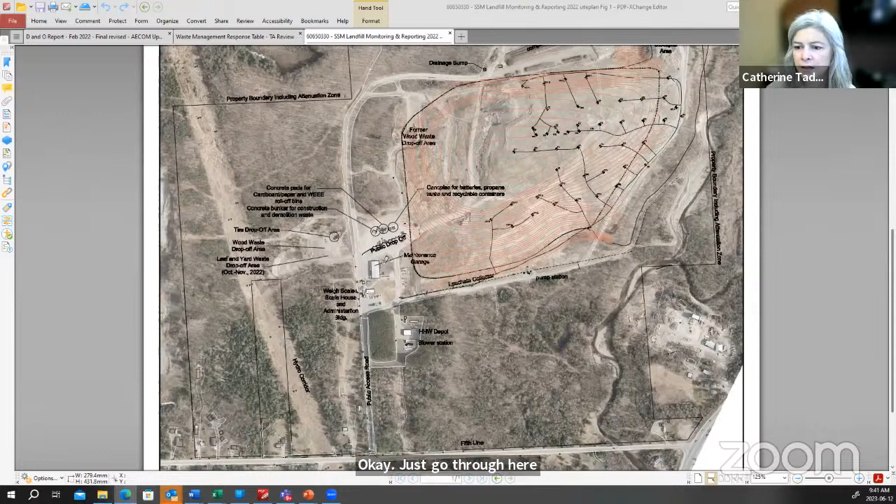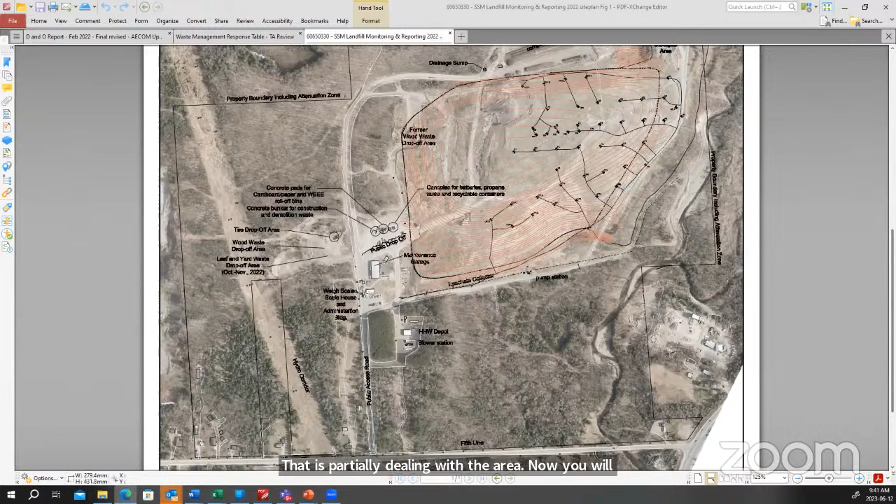Okay, just go through here. We have Jace Dominy from the Ministry of the Environment. Jace, did you want to introduce yourself? Good morning everyone, I'm Jace Dominy. I'm the environmental officer partially dealing with the area now. You will see Sarah Louchis on here as well, and she's the new environmental officer dealing with Sault Ste. Marie, and she can introduce herself as well. Okay, great.

Hi, Sarah. Hi there, can you hear me? Yeah, hi, I'm Sarah Lauschus. I work with Jace Dominy in the Sault Ste. Marie office, and like he said, I'm a new environmental officer who will probably eventually be taking over this area. Okay, great to have you.

So I think that's everyone. We'll let Rick introduce Rob, we can put him on the agenda here. I've now got a view where I can see everybody on the screen. Oh, great. So I'm Rick Talvitie, everyone. I work with AECOM, a local engineering firm. We've been intimately involved with the landfill site for over 20 years now in terms of planning and operational issues. And we work with our subconsultant Dillon to produce the annual reports.

And I'll let Rob Kell introduce himself. I'm Rob Kell, I work for Dillon. I've been working at the Sault Ste. Marie landfill for about 30 years, and for the last 20 of them working alongside AECOM.

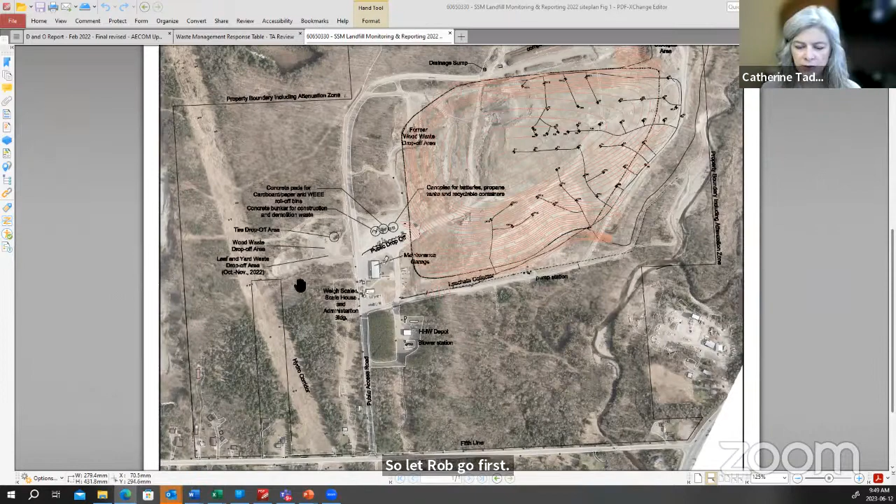So again, Rick Talvitie with AECOM. Before I get into the reports, and given we do have some new members, I thought it would be worthwhile to put up an aerial image of the landfill site itself, just to give the lay of the land as we talk through some of the content of the presentation.

So what I have up on the screen is an aerial image of the landfill. Down at the bottom of my screen here is Fifth Line, and this here is the access road into the landfill site. We have our household hazardous waste depot here, together with our blower station, which is used to draw landfill gas from the landfill mass. So this is our landfill mass itself up here. This is where we're disposing of waste within the landfill footprint. You'll see these lines with these little dots on them.

This is the landfill gas collection system. So the little dots are landfill vertical wells within the landfill mass. And then there's a series of underground pipes, which are these black lines. Those pipes will all come down to the blower station. So basically there's a large fan at the blower station, which puts a vacuum within the landfill mass where these pipes are, and draws landfill gas out of our landfill mass. And down at the blower station, there's a flare where we burn that landfill gas.

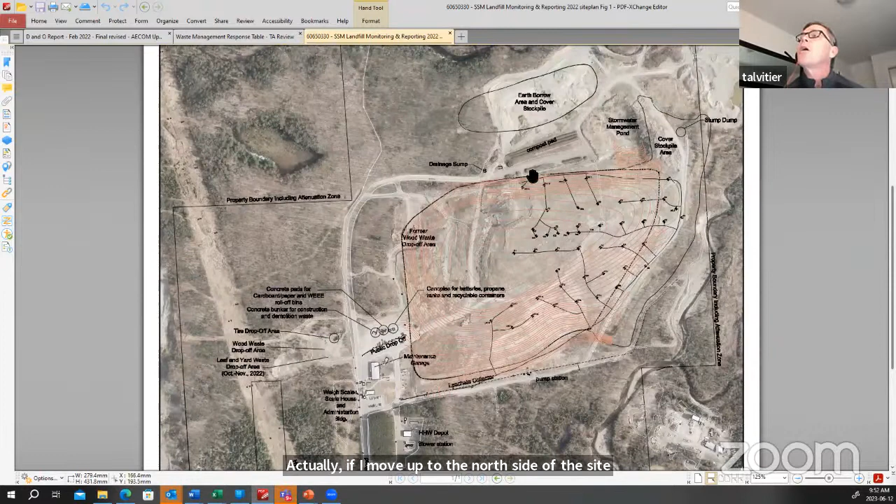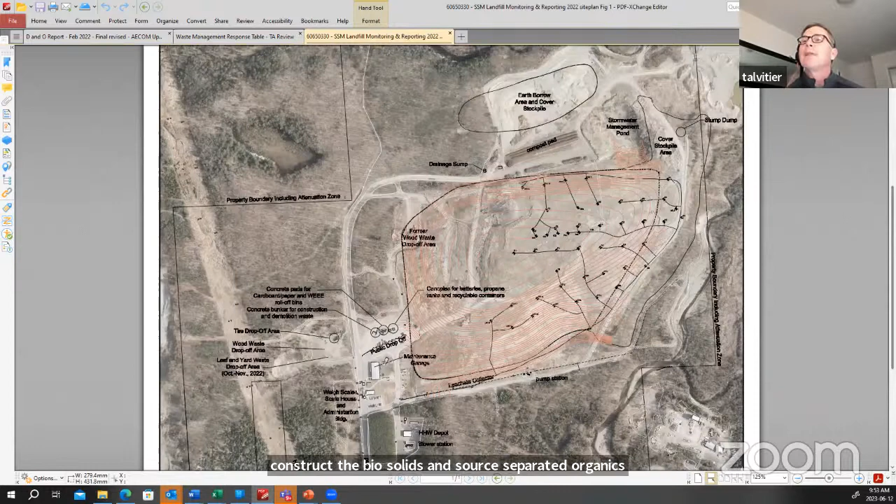So that just gives you a little bit of the lay of the land. Actually, if I move up to the north side of the site before I move on, there is our composting pad up here where we do compost leaf and yard waste. And we've been actively excavating earthen materials from the north portion of the site to use for landfill cover. And this is the area here where we are proposing to construct the biosolids and source separated organics processing facility. So that gives you a little bit of the lay of the land, and then we can lead right into the presentation.

So what we want to do today is present to you the two reports that we prepare on an annual basis for the landfill site. There's two separate reports, one prepared by AECOM, called the Site Development and Operations Report, which you see in the background here. That report provides information on site operations over the course of the 2022 operating year. The other report is prepared by our subconsultant Dillon, called the Monitoring Report, and it addresses groundwater and surface water quality within and around the landfill site, and also talks about landfill gas. So I'm going to lead right into the Site Development and Operations Report.

The first thing we want to highlight is that site operations and reporting requirements are dictated by what Peter referred to earlier, the site certificate of approval. It's basically the license issued by the Ministry of Environment, Conservation and Parks in terms of how the site is to be operated and reported on each year. Our site accepts domestic, commercial, and non-hazardous solid industrial waste and processed organic waste. When we talk about processed organic waste, we're really talking about sewage sludge generated at our two sewage treatment plants. We currently have a tipping fee of $77 per ton and a gate fee of $11 per visit for anything up to 300 kilograms. So when a residential customer visits the site, they pay $11 at the gate, as long as they're not bringing in more than 300 kilograms. If they bring in more than 300, then the tipping fee, the $77 per ton, would kick in. And as I noted, the reporting period is the calendar year.

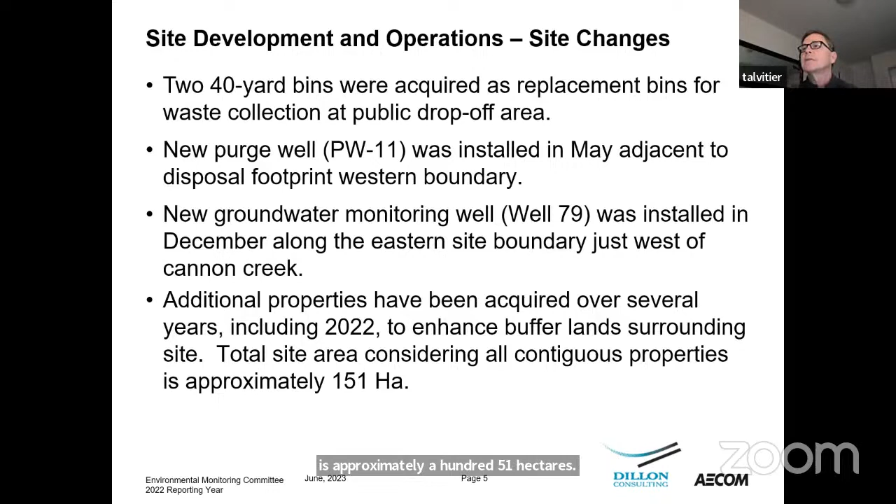There are a number of diversion activities that occur at the landfill site. In the bottom right-hand corner, you can see a photo of the household hazardous waste depot. We also have a couple of other photos at the public waste drop-off where we have an electronics bin, and normal collection of the typical blue box and yellow box materials in terms of containers and fibers.

As we mentioned, there's a leaf and yard waste drop-off area at the public drop-off, a small concrete compound where people can deposit their leaf and yard waste. That has now been established at the public drop-off. We had an interim area to the west of the public drop-off, and now there's an area right at the public drop-off for depositing leaf and yard waste.

There are also areas for tires, batteries, propane tanks, metals and appliances. Wood waste is immediately to the west of the public drop-off area. As I mentioned, normal recyclables, fibers, and containers, and then we have waste electrical and electronic equipment at our household hazardous waste depot.

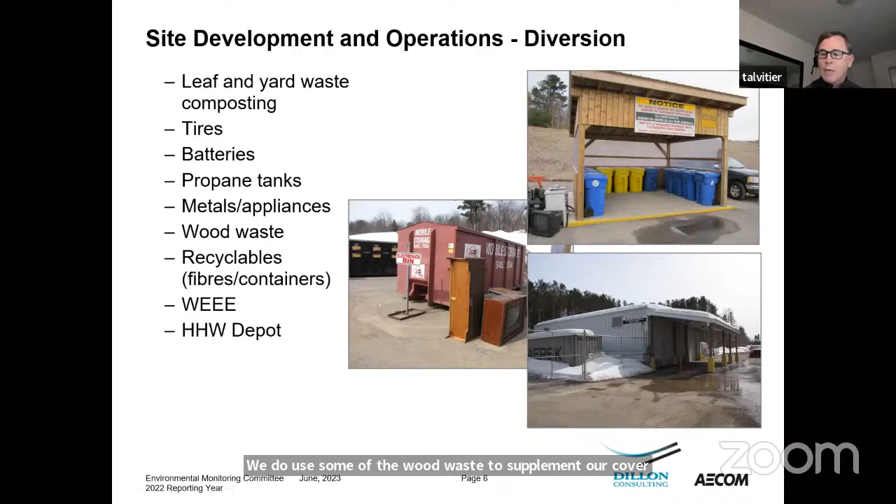Those are all materials that are diverted from the landfill. They don't end up in our landfill as waste. We do use some of the wood waste to supplement our cover materials in some cases, but in general it's not considered waste—it's used for a beneficial purpose to supplement our cover.

When we talk about nuisance management, the two key items are litter control and odors. For litter control, we are actively compacting the waste on a daily basis with the waste compactor, which binds the waste together to try and prevent windblown litter. The waste is also covered on a regular basis to prevent windblown litter.

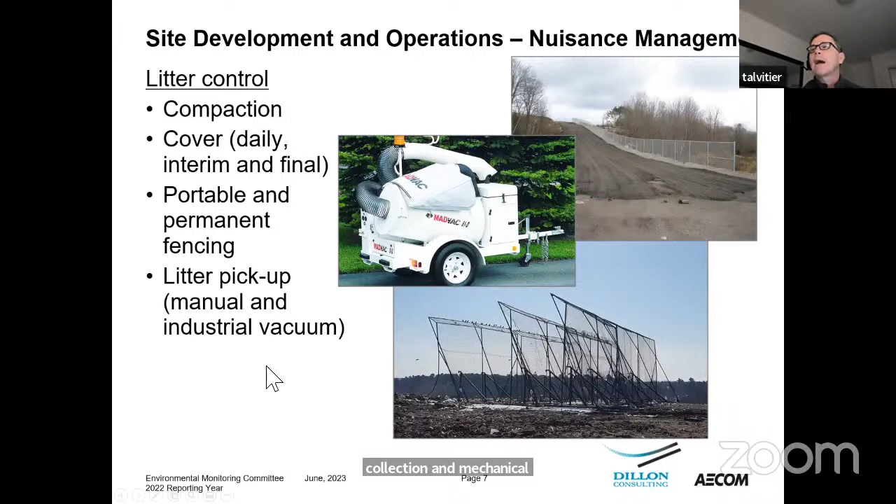On the odor control side, one of the principal items we have is the active landfill gas collection system—that series of pipes I highlighted at the beginning of the presentation. Here in the top right corner is a picture of the flare where we burn that landfill gas, and we have our blower station, which creates a vacuum within the landfill mass, drawing the foul air out and burning it at the flare.

The other major item that produces odor is the sewage sludge that comes from the treatment plants. Before that sewage sludge leaves the treatment plants, an odor neutralizer is applied to the trailers that contain the sludge before it leaves the two sewage treatment plants and comes to the landfill.

Once the sewage sludge is emptied at the landfill, they reapply the odor neutralizer before those empty trailers are hauled back to the two sewage treatment plants. When they're in transit with the sewage sludge, impermeable tarps are applied to the trailers to try and contain those odors, and we do regular wash downs of those trailers.

36 of those washes were completed in 2022, intended to remove residual sewage sludge on the trailers that may create odors. At the landfill site itself, we have a portable odor neutralizing mist sprayer, shown in this photo in the lower right-hand corner, which is used when we are tipping the biosolids at the working face.

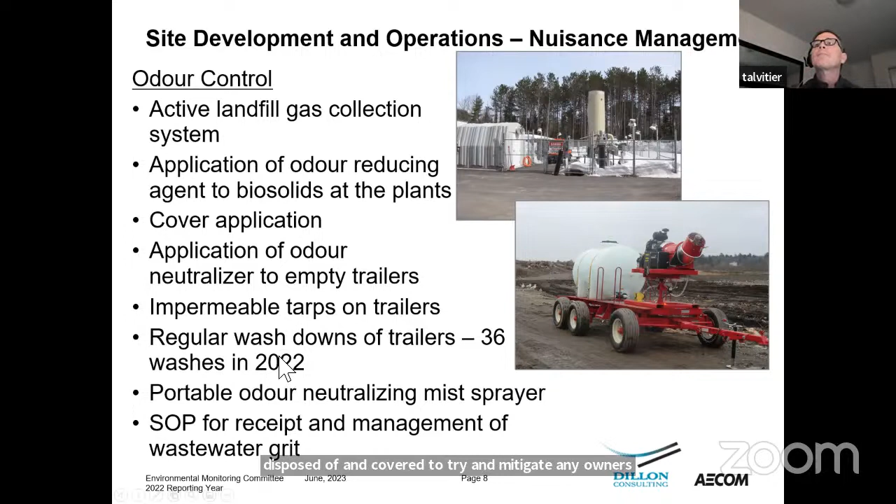This graphic shows where we've been active with waste disposal in 2022 and where we plan to be active in 2023. Our active waste disposal area has been in the northwest corner of the landfill footprint, and that will continue in 2023. There may be an area in the central portion of the site that we move to in 2023 as well. We're currently discussing that with landfill operations staff.

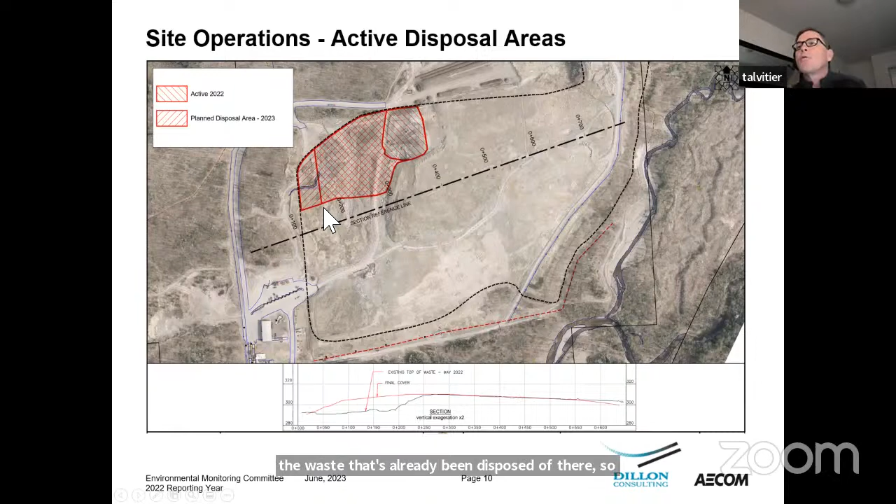With the landfill expansion, we've identified an area in the southwest portion of the site where we will be mining the existing waste out — excavating waste already disposed of there so we can install a leachate collection system underneath. So we want to try to stay out of the southwest quadrant as much as we can, to minimize the amount of waste we'll have to excavate there in the future.

This graphic shows where our residual capacity lies. Where you see yellow, we've reached the final contour or final elevation of the waste mound, so a lot of the eastern portion of the site has been filled to capacity. The darker colors, the purples and darker blues, show the areas with the largest available capacity remaining — purple means more than 15 meters of depth remaining, and darker blues are anywhere from 6 to 15 meters. As we get into the lighter blues, there's still some capacity, but it's a little less.

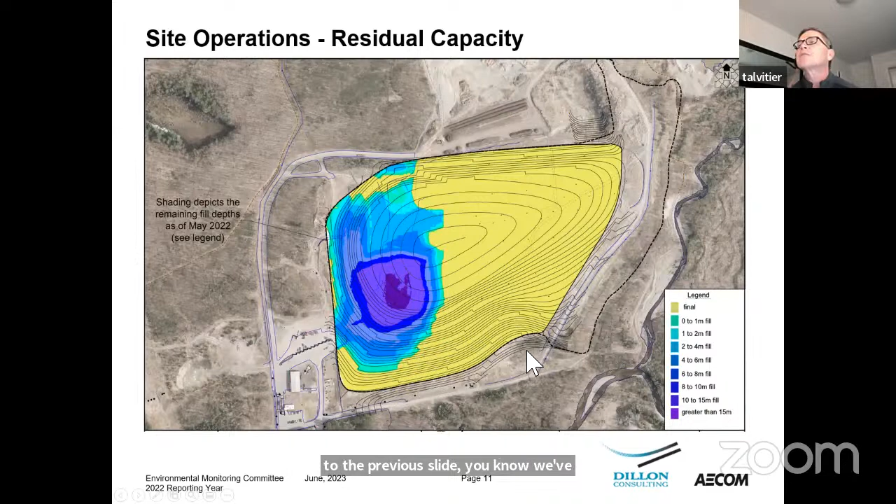Looking at the historical waste diversion rate, there was a significant focus on enhancing diversion activities in the early 2000s. We were engaged by the city to do planning work related to their waste programs, and at that time there was a distinct need to enhance diversion. It paid off as we increased diversion substantially from around 10% up to and above 30%. There was a period where we reported diversion in the mid-30s, but we identified discrepancies where it may have been overstated somewhat — that was corrected. Generally speaking, we've been in the 30% range now for 6 or 7 years, which is probably where it should have been in those earlier years too, closer to 30%.

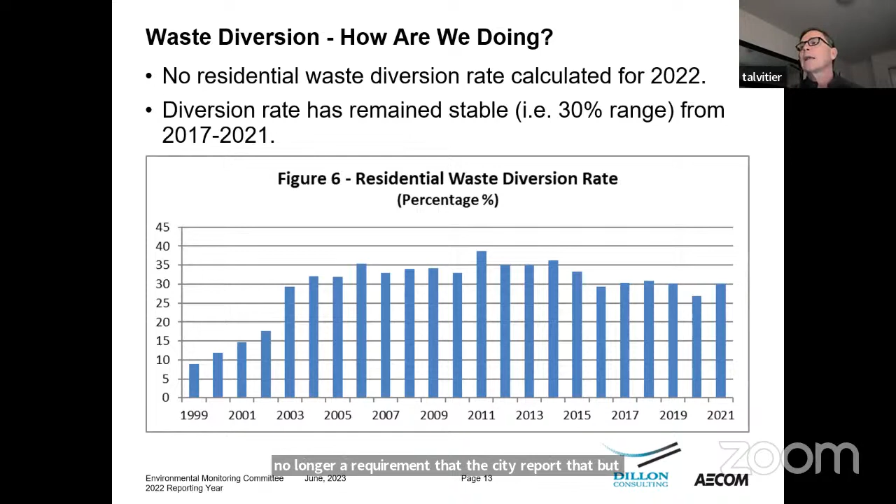We are no longer required to report to Waste Diversion Ontario with our diversion rates, so the last year we've reported is 2021. We don't have a diversion rate for 2022 since it's no longer a requirement, but we expect it continues to be in that 30% range.

When we look at waste disposal quantities, these are the quantities of waste actually disposed of in the landfill mass. There was a time back in the late 90s where we were disposing of in excess of 100,000 tons a year, and as you can see, there's been a steady decline over time. Over the past roughly 5 years, we've generally been around the 40,000 ton per year mark.

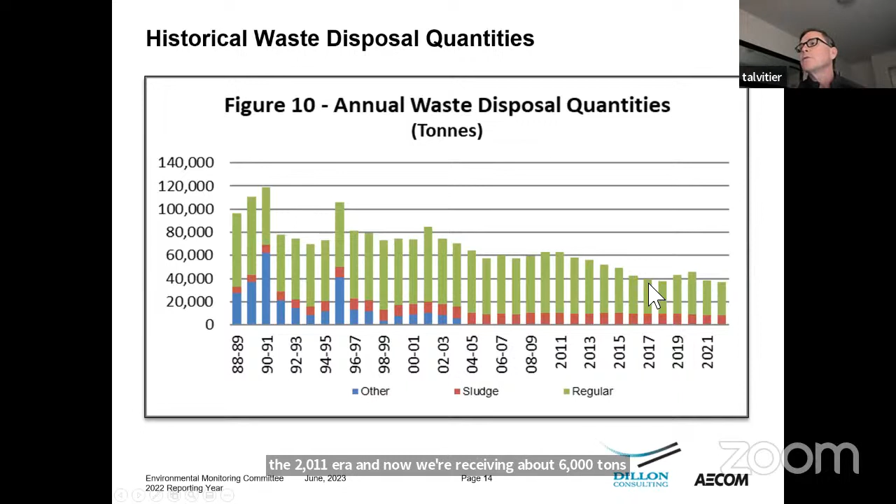In the last 2 years, we've actually been below that, in the 38,000 and 36,000 ton per year range. Part of the decline from 2011 through to 2017 relates to the fact that some of our industrial, commercial, and institutional waste is being exported to a northern Michigan landfill. There was a time we were accepting about 25,000 tons of commercial or business waste at the landfill back in the 2011 era, and now we're receiving about 6,000 tons. So a lot of this decline in waste is related to the ICI waste.

If we look at waste received at the landfill, we've got two pie charts here, one showing 2021 and one showing 2022. Just to contrast, what we received in 2021 was 112,000 tons of waste at the landfill, but what we actually landfilled that year was about 38,000 tons. The reason for such a big disparity between what we received and what we landfilled is because we received a significant amount of surplus construction materials, largely old aggregates and soil materials, and we actually use those materials for cover. So they don't factor into our landfilled waste quantity.

Similarly, in 2022, we received 84,000 tons of waste and ended up landfilling about 36,000 tons. So again we saw a large proportion of surplus materials from construction projects, not quite as high as in 2021, but still a fairly significant amount of waste construction materials being used for cover material.

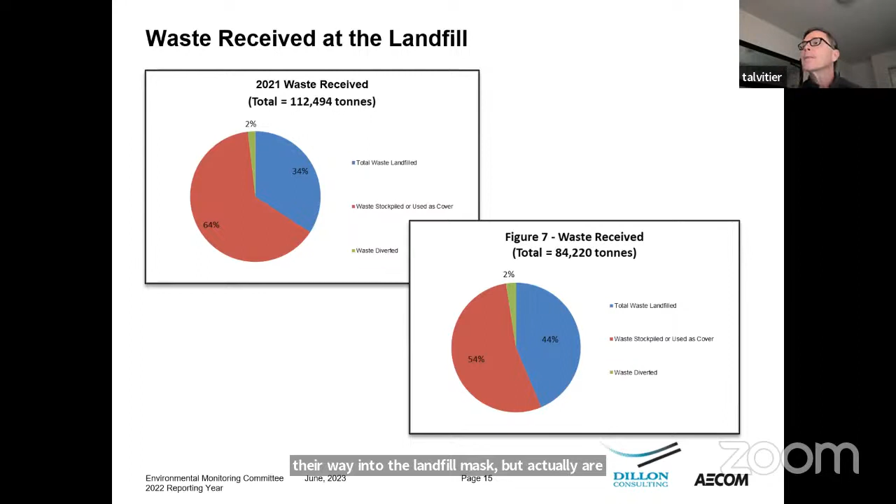You'll see waste diverted, that small piece of the pie is basically those diversion activities we went through earlier that don't find their way into the landfill mass, but actually leave the site and get distributed elsewhere. When we compare that 2% diversion quantity between 2021 and 2022, the numbers are quite similar, just over 2,000 tons in both years.

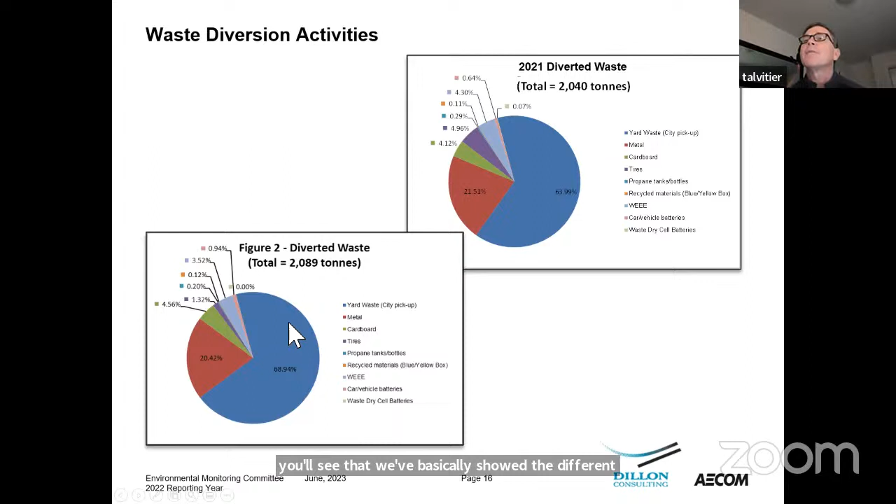We've basically shown the different types of materials being diverted from the landfill, the biggest being yard waste, which makes up almost 70% of the diverted waste. The other big one is metals, making up about 20%, then we have cardboard material, tires, etc. That is the makeup of the diverted waste, and it does seem fairly consistent year over year.

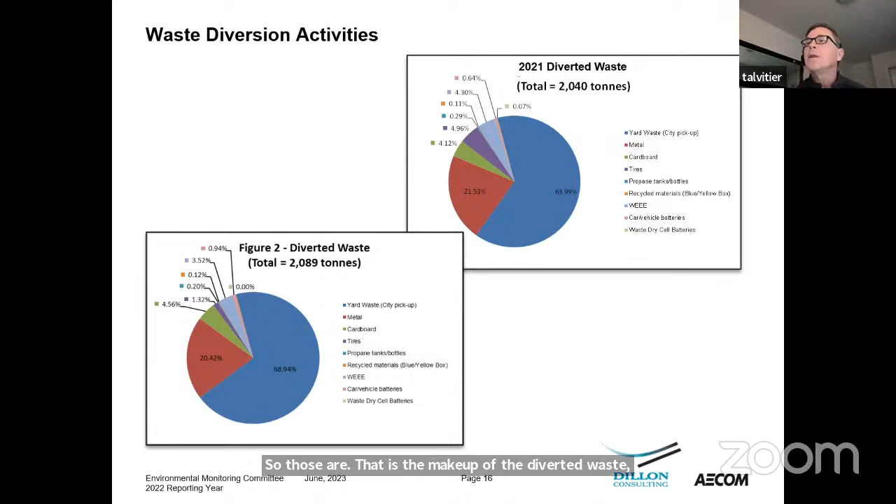Now when we look at the landfilled waste type, this is the waste that actually gets disposed of in our landfill mass. In 2021 we had about 38,000 tons, and in 2022 about 37,000 tons, so fairly similar, with a slight drop in 2022.

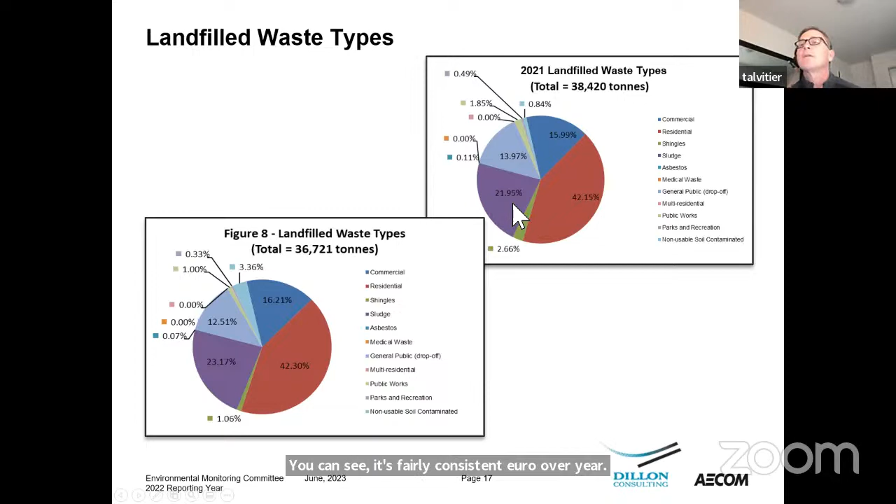If we look at the major components, about 16% is commercial waste. The lion's share is residential waste, primarily coming from our curbside program, as well as residential waste deposited at the public drop-off, making up about 42% of our waste. We also have shingles, and sewage sludge is a major component. The general public drop-off makes up about 13%, and you can see it's fairly consistent year over year. Those are the major components of the waste being deposited in the landfill.

Residual waste disposal capacity is computed and reported annually. It will fluctuate year to year for various reasons. One reason is our landfill mass has up to 30 meters of waste depth in it, so over time underlying waste will settle and degrade, which may actually generate additional disposal capacity as that waste settles.

Capacity also depends on how interim cover and contaminated soils are managed within the disposal footprint, and on waste types and disposal rates. At the end of 2022, as Peter indicated, we have approximately 5 years of residual site life left. Comparing that to the end of 2021, when we reported 5.3 years of residual capacity, despite operating the site for a full year, we only used up 0.3 years of capacity.

The reason for that is we don't complete a full survey of the site every year, so we're using a survey that may be a little dated, adding to it the waste that has come into the site based on quantities crossing the waste scales. In other cases, when we do survey, we may find that areas where we thought we no longer had disposal capacity actually have additional capacity due to settlement. So going from 2021 to 2022, we're reporting that we've used up 0.3 years of capacity.

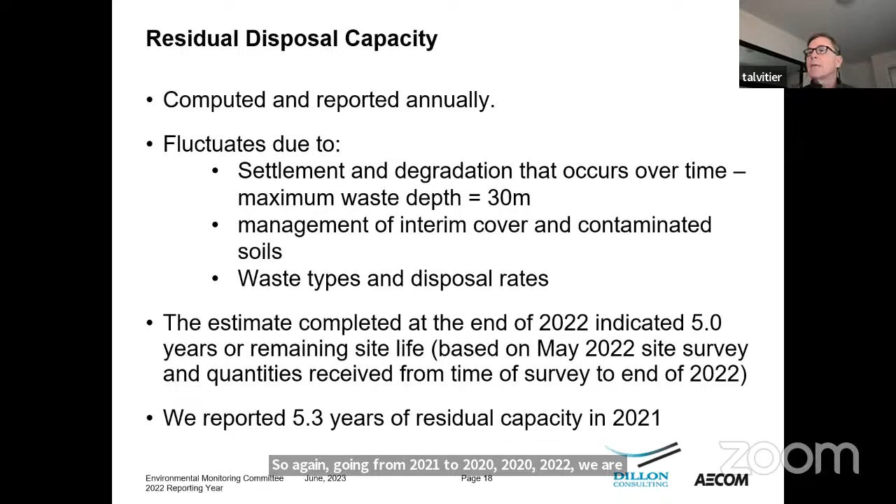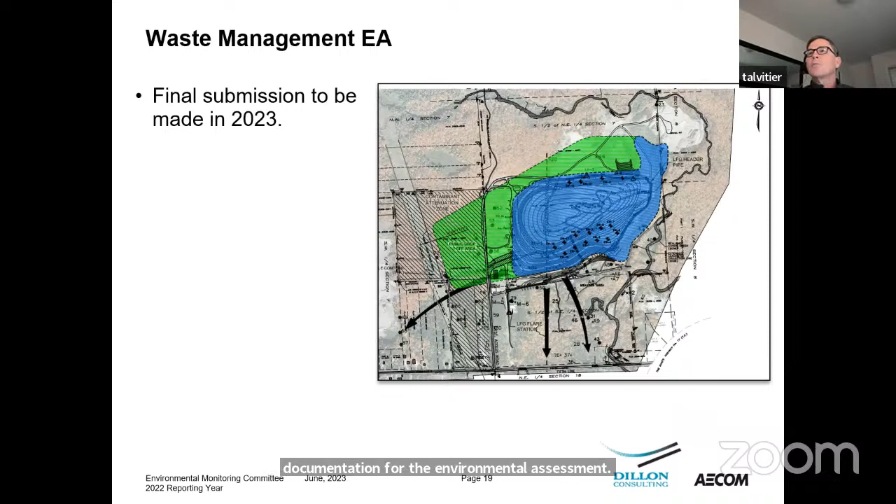For those that are new, on the waste EA map, the blue represents the existing disposal footprint we currently have. The green shows the new disposal area we're looking to get approved through the environmental assessment process, which would give us additional capacity of approximately 20 years. We're currently working on the final touches of the documentation for the environmental assessment, and we'll be submitting that in the near term to the Ministry of the Environment.

Before turning it over to Rob to talk about the monitoring report, I want to re-highlight what we do in terms of managing potentially contaminated groundwater generated from the waste mound. We have a horizontal collector that operates much like a French drain along the south and southeast portion of the site. As groundwater flows towards the south and southeast, it enters this subsurface collector and flows by gravity to our pump station on site.

On the western side of the site, we have a series of 11 purge wells that operate continuously, collecting groundwater and sending it to our pump station. That leachate is then pumped to the West End Sewage Treatment Plant for treatment. In 2022, we averaged 13.9 liters per second over the course of the year continuously, or 439,000 cubic meters of leachate collected and sent to treatment.

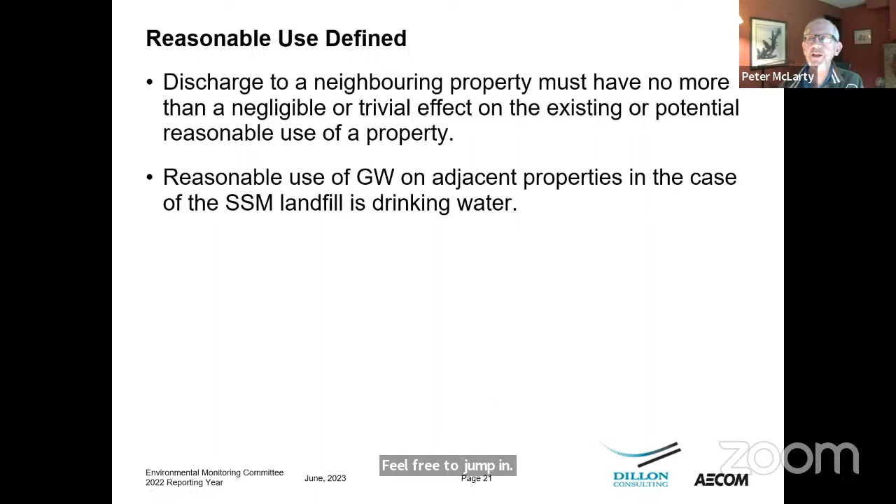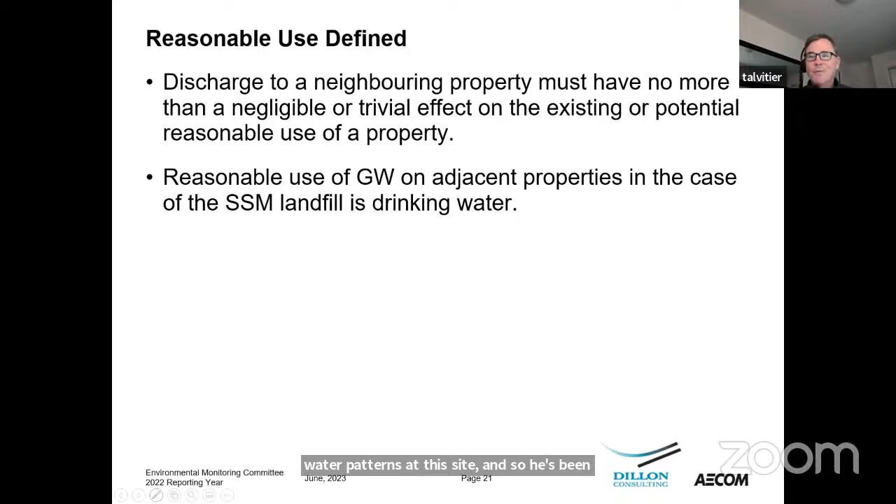Okay, Rick, you want to introduce Rob again? Yep, so Rob Kell, as I mentioned, is with Dillon Consulting. They've been actively involved with site monitoring dating back, actually they were involved when the city initially took over this landfill site from Cherokee Disposals back in the late 80s. Rob has a long operating history and very extensive knowledge of the groundwater and surface water patterns at this site, and he's been reporting on it for over 30 years. So Rob, over to you. Okay, so thank you.

Our first few slides are going to be talking about how we assess our water quality. So there are repeats from before, but with the number of new members, it's important for us just to get a little bit of a basis on how we assess our groundwater quality.

Our first definition would be called reasonable use, and that is developed by the Ministry of the Environment. It's a measure of how you can discharge to a neighbor property, but it has to be no more than a negligible or trivial effect. For the case of the Sault Ste. Marie landfill, our reasonable use of water is drinking water.

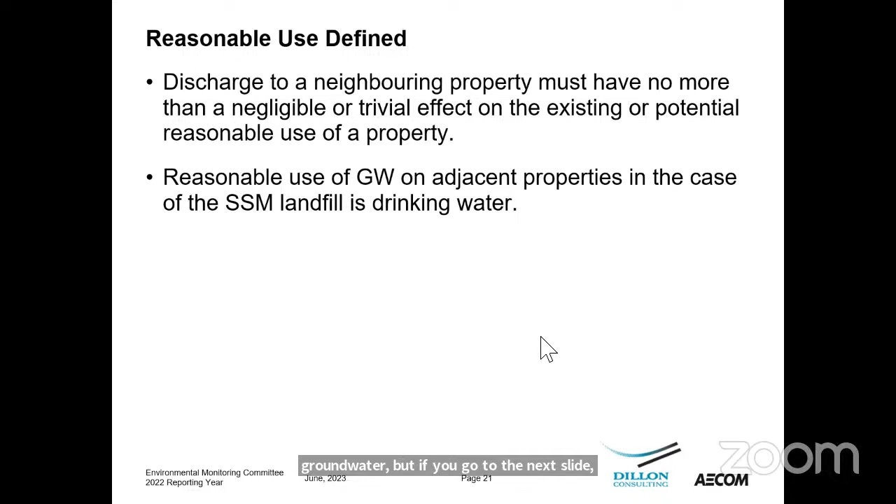But if you go to the next slide, please, Rick, or whoever's running the show. This is kind of a graphic.

So there are drinking water standards, but to establish a trivial effect, what's been established is that we cannot degrade water quality more than 25% of the difference between our background and the drinking water standard for health-related parameters. For aesthetic parameters such as chloride, you're allowed 50%. So it's not that we can degrade water quality up to the standards, we're only allowed a proportion of that. There's a graphic there that assesses it.

So we have a background water quality. For health-related parameters, it's only 25% of an increase, and for the aesthetic, it's 50%. So when I refer to the reasonable use and the standards developed from that, it's only a percentage of the drinking water standard. Next slide.

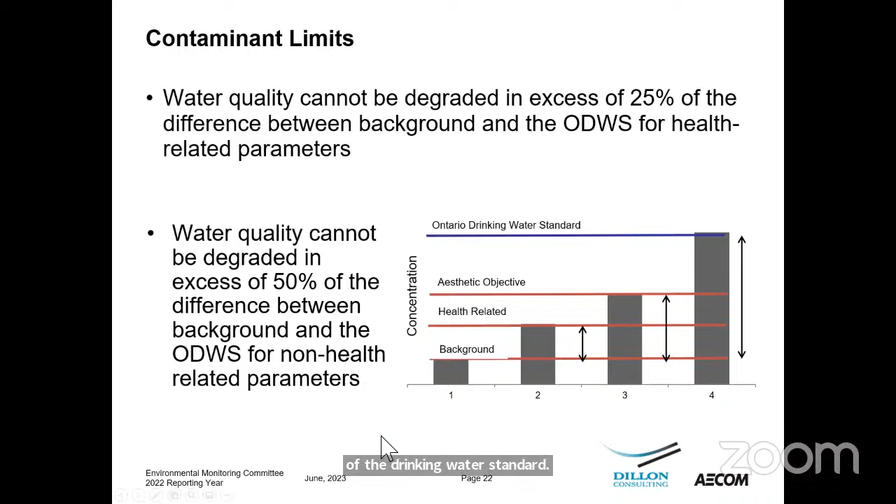Over the years, the first monitoring wells were installed at this site in the early 80s, back when it was Cherokee, but there's been what we call monitors or monitoring wells - I'll use the terms interchangeably. Over the years, there's been over 200. About 98 of them are still in good condition, and we record water levels in them.

Our program requires us to take samples from 40 of the monitoring wells. These monitoring wells are included to be sampled because of their location, and some wells are nearby each other, so we only sample the one well. So there's 40 active monitoring wells where we take samples from.

And then we also take a sample of the leachate or leachate-contaminated groundwater that we collect. In terms of our monitoring wells, we try to establish background wells, or wells that are located what we call up gradient, or away from landfill effects. We have monitoring wells near the landfill mass itself, and we call them source wells. And then our monitoring wells themselves are located along the groundwater flow pathways away from the fill area.

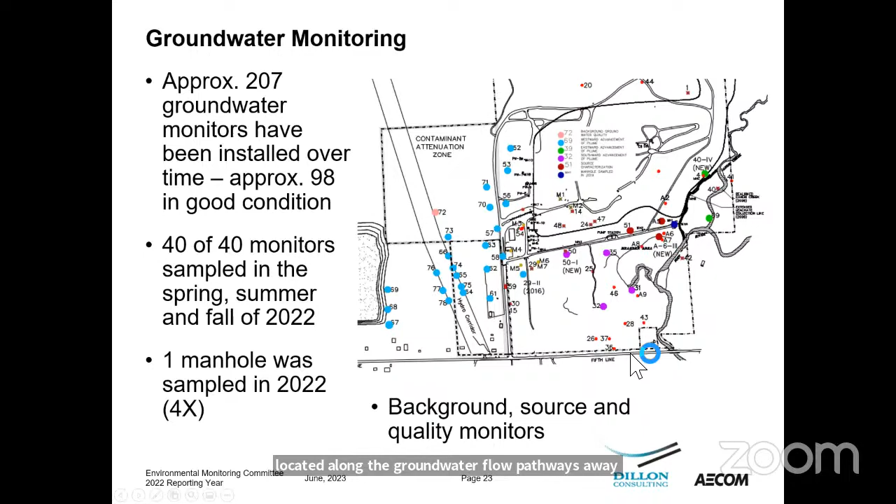Next slide. So what do we monitor and how often? I mentioned this previously, but we take water levels from all existing accessible wells. Water levels allow us to track how groundwater moves on the site.

Similarly to how topography and surface water goes downhill, our water levels in our wells are used to assess where groundwater is moving - it basically moves from areas of high groundwater to areas of low groundwater. I have some graphics later on that show the movement.

For quality, city staff take water samples from the wells. They get sent off to a laboratory. We get our results back and compare them to the reasonable use criteria. The target parameter list we do is general chemistry, and major and minor ions are used more or less to assess groundwater quality trends and impacts. But we also look for trace metals and volatile organics in the groundwater samples.

We also do surface water samples, by the way, but that's coming up. In terms of how we assess if the water quality is being significantly impacted with leachate, what we key on are chloride and alkalinity, electrical conductivity, and total organic carbon.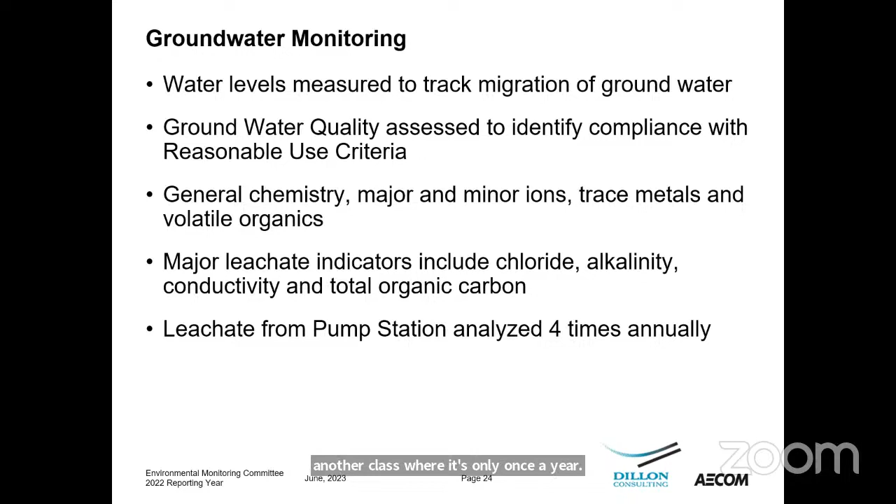So here's a graphic of the site, and I'll spend a little bit of a moment on how groundwater flows and how we collect leachate at the site to prevent off-site migration. First of all, I talked a little bit about the term leachate, and I just used the term leachate impacted groundwater. All the fill on this site lies above the water table.

Rainwater that gets through the final cover, or in our active areas, percolates down through the waste and into natural soil underneath the landfill, and it mixes with the groundwater there. So what we collect on this site is actually groundwater that's been impacted with leachate, and therefore that's why we have a permit to take water, limiting how we do these things. There are two components of groundwater flow at this site, and it all has to do with topography and the effects of the Root River, and the non-effect as you move further away to the west.

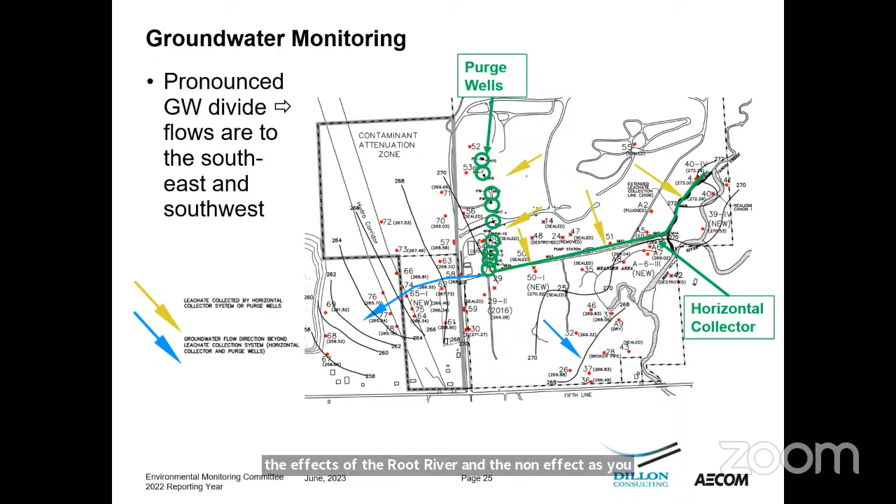So as Rick mentioned, on the south and east side, we have the Root River and Canon Creek. Canon Creek is on the north, and it curls around and comes down the east side. And of course, the Root River is a bit further to the east.

In that area, we established this horizontal collector system. We have topography working for us. The water table is fairly shallow in that area, and so it allowed us to put in a horizontal collector system. The southern leg of that was installed in the early 90s, and then it was extended up along the alignment of the former Canon Creek.

To collect leachate and protect Canon Creek there. South of that collector, if you're familiar with the area, is what we call the meander area. It's a bit more low-lying, and that's the area that back in the 80s was impacted the most at this landfill site. We also have to remember that the landfill was filled east to west, so we really didn't have waste soils on the west side of the site at all. So back in the 80s, all of the impacts were occurring in the meander area beside the Root River.

Our collector system that was installed back in the 90s and extended in the 2000s has really protected that area. As we move off to the west, we have a component of groundwater flow that's not influenced by the Root River and surface water, and it flows kind of in a south and west direction. The topography is such there that the water table is quite deep. So the way we collect impacted groundwater there is with a series of these purge wells.

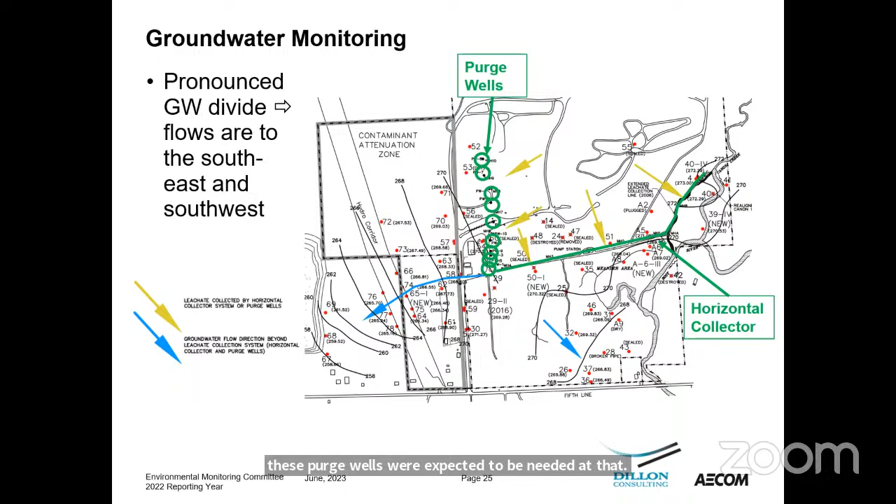We knew that even if you go back to the reports in the early 80s, that once the landfill expanded to the west, we were going to have a westerly component of flow. So the impacts flowing to the west were expected to occur, and these purge wells were expected to be needed at that time. And so they intercept the leachate impacted groundwater as it moves towards the south and west. Maybe next slide.

So the next few slides have a lot of words. They're from the monitoring report, but it's just what we have done in terms of discussion on our monitoring results. We've kind of divided it into those two different zones.

As I said, on the east and southerly boundary, we have good control of leachate impacts, certainly after the extension of the leachate collection system to protect Canon Creek in, I think it was 2006, if I can remember. So it's been in place for a while. We've seen really good improvement in terms of surface water quality, which I will get to, but as well as groundwater quality.

We did install a new well, basically right in the corner of where Canon Creek enters the Root River, just upstream of that point. We had issues with a previous well there that was installed on the landfill side of the collector, and it was, of course, having some impacts. But we found a location where we could install a well that's in between Canon Creek and our collector system, and it will be very valuable in terms of providing some really current data on anything that could be getting beyond our collector, but before it enters Canon Creek.

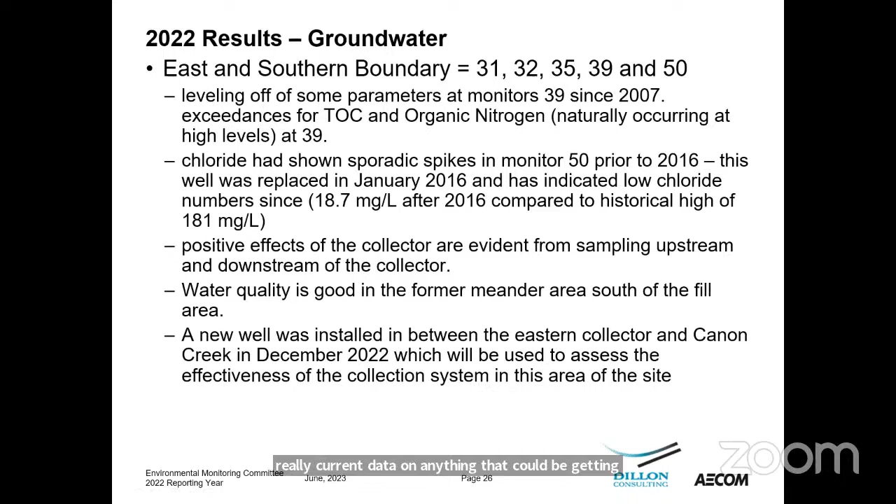I think I'll move on. And so on the western side, we have a number of active wells there. In the northern part, I talk about monitoring wells 71 and 73. They're to the north and they reflect background quality.

We have impacts in this area as groundwater flows beyond our purge well system, and these impacts have resulted in a very narrow plume. I have a graphic in the next slide that shows it, but there's a very narrow groundwater plume that's been in existence now for going on 20 years. The impacts there fluctuate in terms of the amount of, in particular, chloride, which is a nice tracer for this site.

When you take away, when you have the benefit of hindsight and look at the 20 years of data in totality, there hasn't been any kind of worsening of conditions on this site. But we still have this narrow plume that somewhat terminates around the hydro corridor.

Maybe the next slide would be a good one to show. So these are those dark lines. They're what we call isoconcentration lines, or lines of equal concentrations. And you can see that we have this narrow plume that's centered on monitoring well 65 in this case.

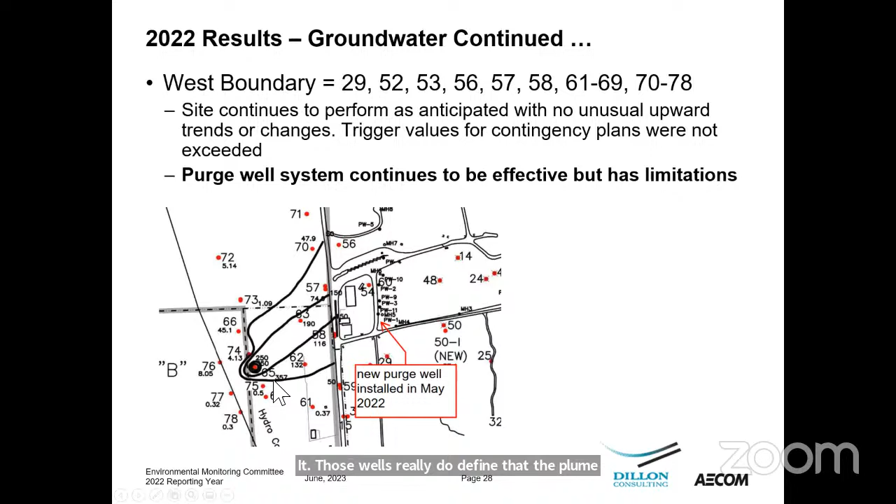Okay, so that's a concentration of chloride. You're looking at 8 milligrams per liter, 0.3 milligrams per liter, and 0.3 milligrams per liter. But if you move closer in that area, you'll see things like 250, 350. So you can see there's a much higher concentration at the hydro corridor. We have some wells installed west of that property boundary there, and it really is an effective boundary. Those wells really do define that the plume is not getting any worse in that southwesterly direction.

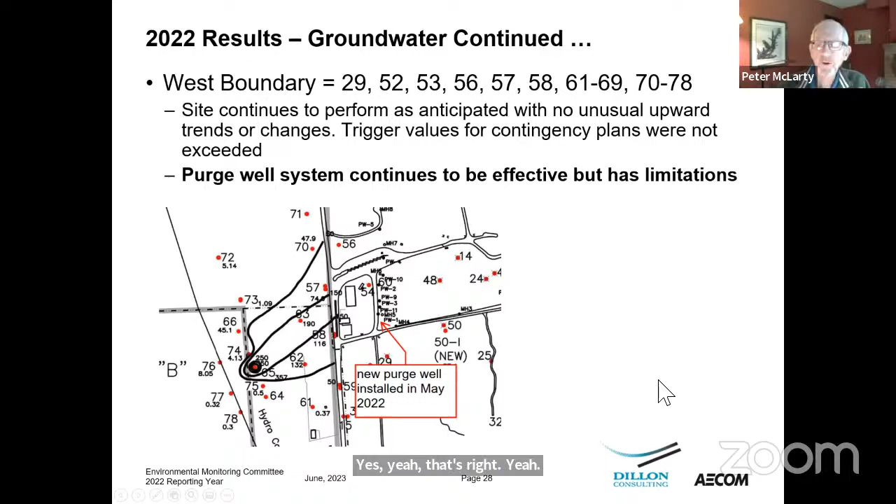Okay, that's a good point. That's what I wanted to highlight. Yeah, that's right. Any other questions? Carry on then, Rob. Thanks.

Okay, and that was a very logical place for questions because I'd like to talk about surface water quality now. We sample 5 times a year, in January, May, June, August, and October. We take samples both from Canon Creek and the Root River. We have 5 active locations. Some of these are historical locations. If you're counting the number of yellow asterisks, there are more than 5, but the active ones are listed there.

Our compliance boundary from the ministry is actually at S5, in the Root River just before it exits the site. But we sample other locations just to see water quality trends as surface water moves around the landfill. The criteria we compare to is not reasonable use, it's what's called the provincial water quality objectives. They've been established by the province as objectives setting levels that should not be exceeded in natural surface water.

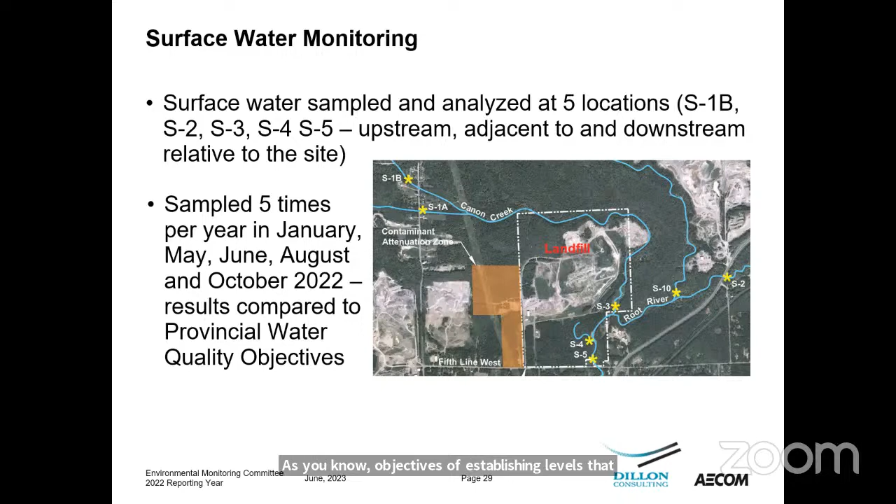We can go to the next slide.

I apologize for all the words on this one, but the parameter that we key on mostly, or that can cause the most effects from landfill leachate, especially from older landfills, is ammonia. Ammonia is toxic to fish in very small quantities. The form of ammonia that causes the most concern is called unionized ammonia, and unionized ammonia is dependent not only on the total ammonia concentration, but also on pH and temperature.

In the last couple of years, we've had problems with measuring our pH in the field. We have a meter that's taken readings. We like to use field pH measurements because they don't sit in bottles for very long, but we also use lab pH when we send the water off to the lab. This year we're going to pay particular attention to calibration of the field meter to make sure we get good data. But when we use the lab pH, our unionized ammonia concentrations are typical of history and don't have any exceedances.

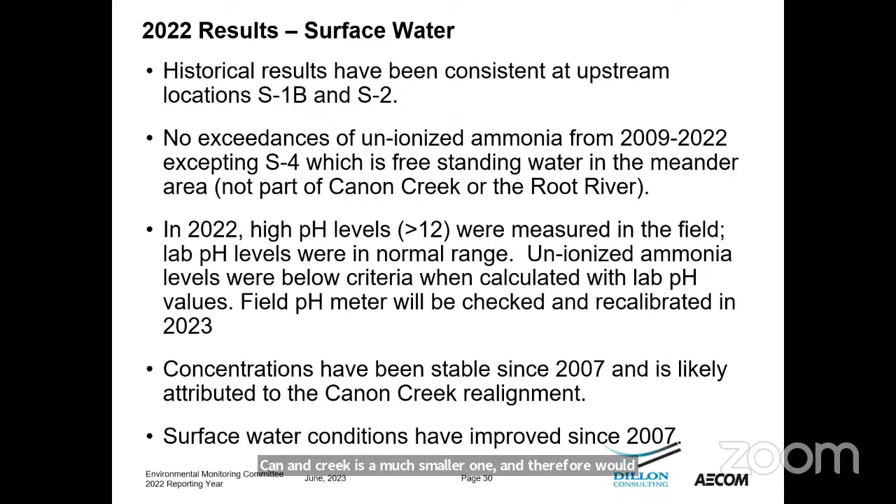Moving on. So the other component of what we monitor out there is landfill gas. We collect gas and flare it, as Rick described, but we also measure landfill gas in the subsurface. Certainly we don't get migration of landfill gas off the landfill proper, but we do get it near landfill infrastructure. In particular, for protection of workers inside buildings, but beyond that too, we had to monitor landfill gas.

There's one area right near the household hazardous waste, those administration buildings, where outside we have high gas levels. For probably about 15 years now, the levels aren't getting any worse, but since that time, we have what I would call elaborate monitoring within the buildings themselves.

The electrical system is tied into an alarm system that is tied into gas detection systems, and we don't have migration into the buildings. If we do, we have fail safes that would cut off power and provide additional safety. So the landfill gas concentrations have been very, they haven't been getting any worse.

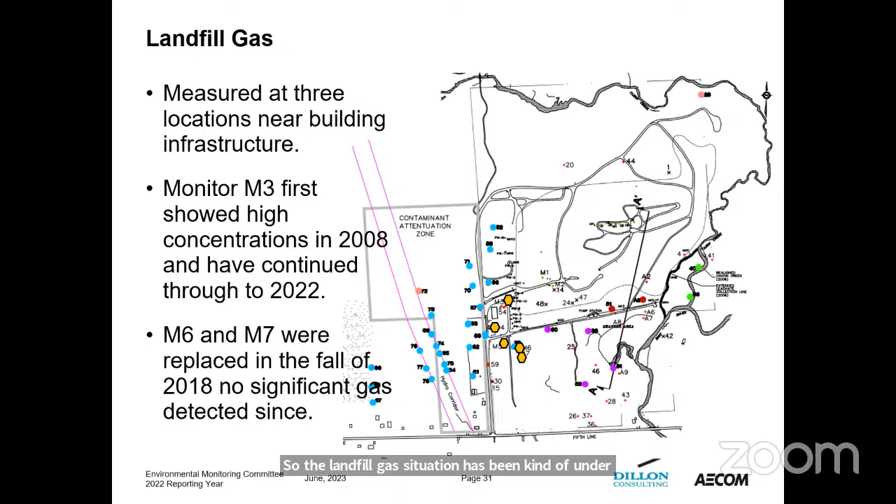This more or less just says what I've said - that the detection and mitigation has been in the building since 2009, so for 14 years now.

So our recommendations - we haven't received formal review comments from the ministry for about 8 years, but we send our reports every year as part of the conditions for the certificate of approval, or it's actually called an ECA, environmental compliance approval, which is the new lingo for that.

So our conclusions: we put in our new monitoring well, which was recommended 2 years ago. It was installed in December, and it will provide some good data between our collection system and Canon Creek.

Our purge well issues and operational issues - they've been operating now close to 20 years. We have our standard operating procedures for these purge wells. We know they're clogged, we know we have preventative maintenance on them that usually occurs in the spring of each year. We keep them operating because, in terms of our past experience with them, we know the amount of inspection and maintenance that's required there.

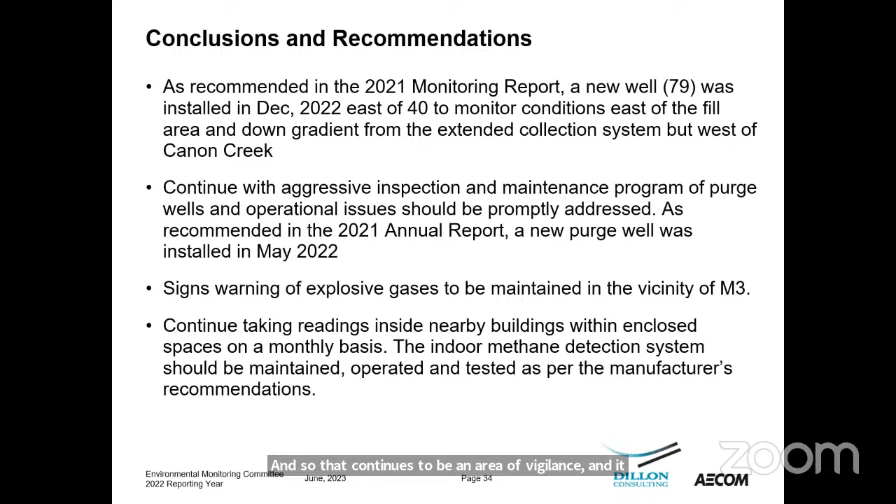And I think that might be it, Rick. I don't know if there's one beyond that too. No, okay, it's not. No, that's it.

Can we pause there for comments? I know for the new members of the committee it's probably overwhelming to have homework reading a report that's 970 some odd pages long. But I do thank you for the digital copy, Rick and Rob, because a lot of the questions you may have historically are recorded there and you can refer to them for future reference.

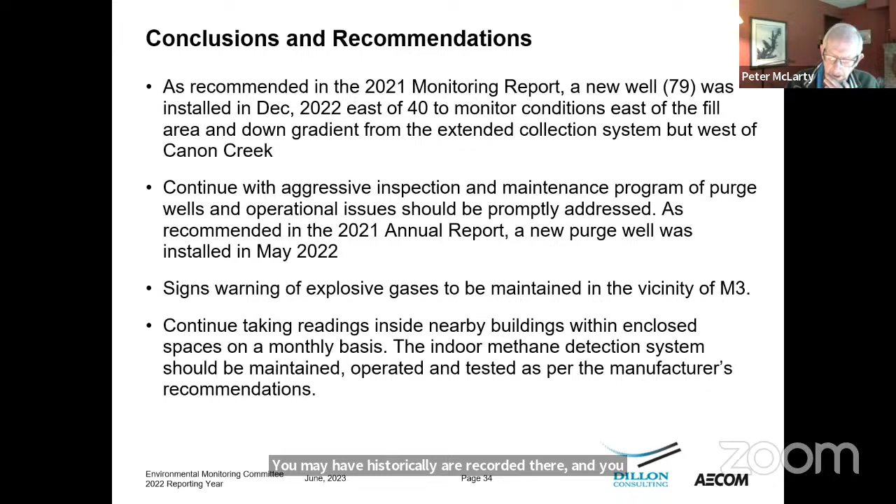Can you bring up page 15 of the report? Of the report itself, yeah, just as an example. And I thank you both for putting well 79 in. The committee did have at least one voice that was very strong in getting that well, and I'm glad to see it's there now.

I'm going to see if I can bring that up quickly, Peter. I think I can. Only because it's coming from our server and it's such a big report. Just let me see how quickly I can bring that up. Okay, while you're doing that, the report has lots of tables with numbers, and for most of us it's too much to handle. But anytime there's a graph, the graph speaks volumes. So I'm using page 15 as an example.

While you're doing that, one of the things I had noted in my comments was the pH surface level, and I had some questions about it. But I see that Rob also has similar questions, so we'll wait for the next one to see how the pH numbers come on the surface water.

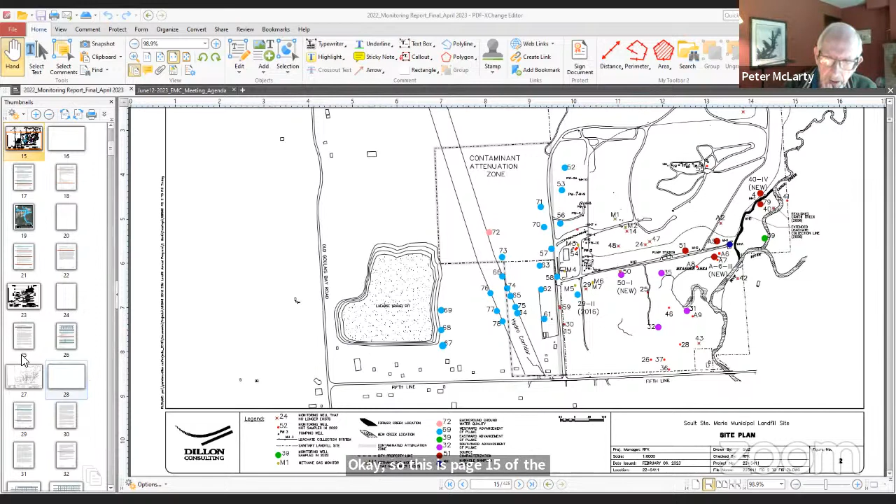Yep, okay, so this is page 15 of the report. Is that the one you wanted, Peter? Okay, it may have been in Rick's report, I didn't know which one of the files I was in. Okay, it's not critical.

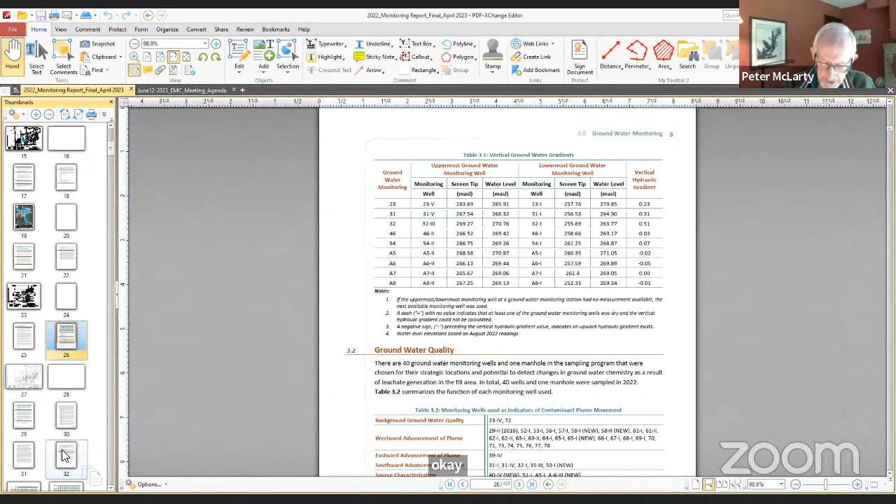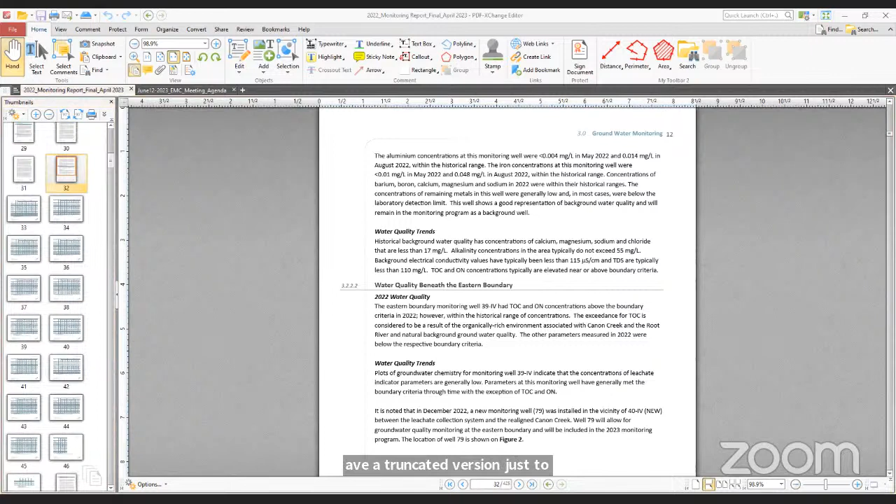The other one that I had is 609 to 619. Oh, of the big report. Of your report, okay. I have a truncated version just to avoid the problems that Rick has, so if you'd just bear with me. It's a massive report, but it makes it easy for future years. Can you just keep on adding to this one?

Because I see you have the ground well analysis for each of the wells as well. Okay, so it just... while you're finding that, the other thing I'd noted here, there's a lot of construction going on right now, and I see piles of stumps. What happens to those stumps?

Mike, is Mike there? Yeah, can you hear me, Peter? Oh, maybe Mike can answer that. Do the stumps end up at the landfill?

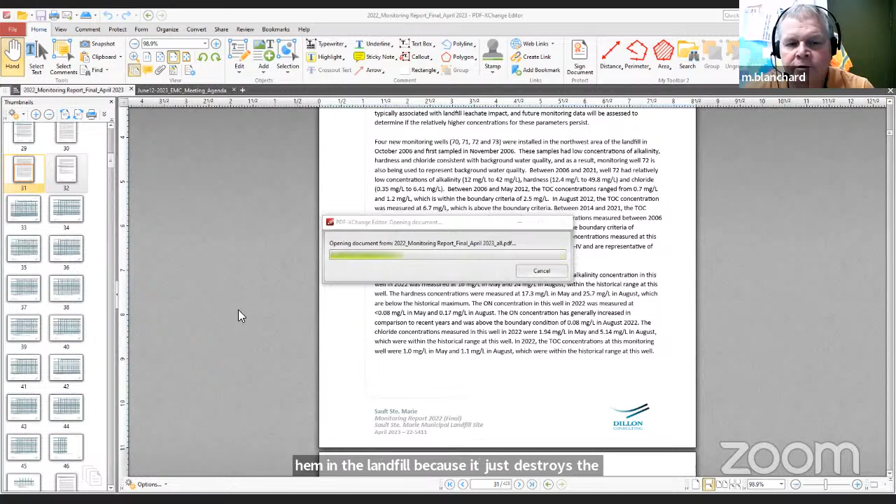Yeah, we have a certain area at the landfill that we take stumps, and we have future plans to grind them. But the reason we separate them out is because right now they can't be ground by our contractor Anson because they're too big, and we can't put them in the landfill because it just destroys the equipment there. So we have a separate place for stumps right now with plans to grind them and possibly use them as feedstock in our biosolids plant.

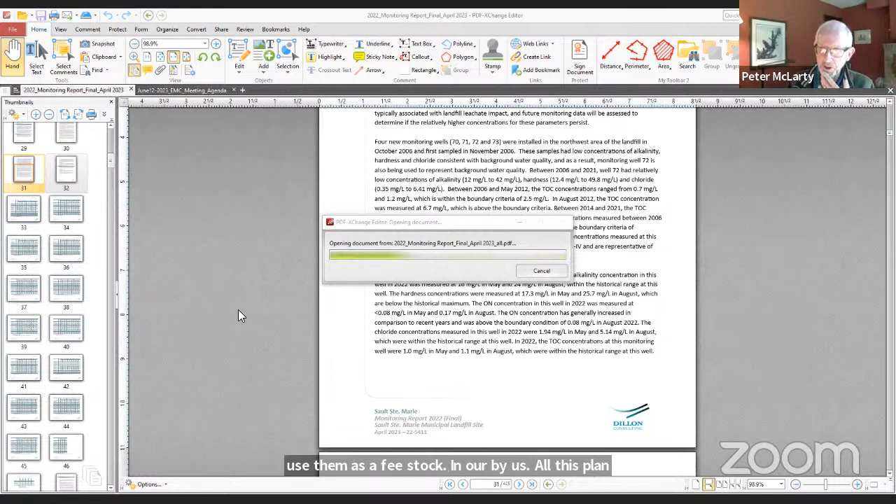Okay, now that was my suspicion, but there was nothing in the report on that. With all the demolitions going on, we've had 2 high schools. There's supposed to be source separating there. The brick and the concrete, is that used as cover?

No, we generally don't accept brick and concrete at the landfill. So what happens to that then? I think that it's recycled. There are some contractors around town that recycle them, but we don't accept that at the landfill.

Okay, another item listed in there is the asbestos, and the amounts shown on the table. I'm guessing those are in tons, but you say you accept it in bags. That sounds like an awful lot of bags. Generally, we get it in say 40-yard trucks, so it's one large bag. We only accept small bags for small jobs, sometimes from the public, but generally it comes in one large bagged container. Okay, because I was noticing one month there was 4 tons of it coming in. That's a heck of a lot of asbestos.

That could have been construction or demolition around town. Yeah, okay.

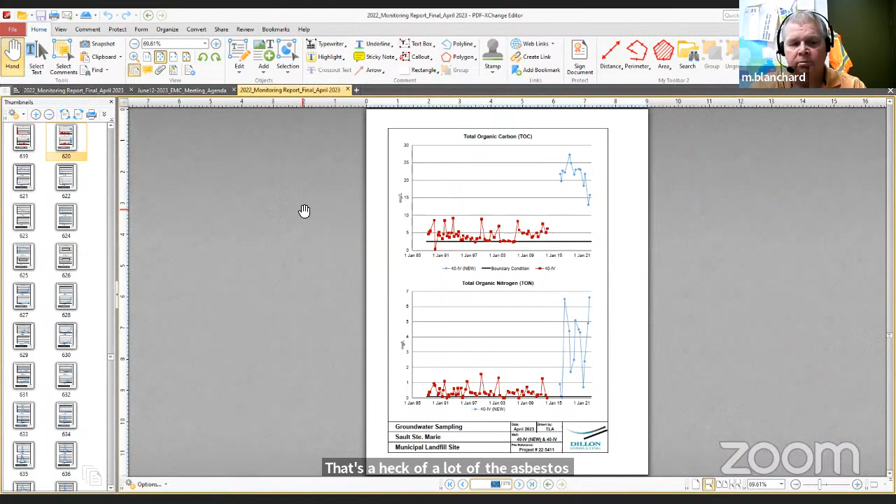So Peter, I have the bigger report on my screen now, hopefully on your screen too, if you wanted to tell me what page you wanted brought up. I'm using this as an example of how there's a lot of data in the tables, but if you see a graph like that, immediately you say, oh, we got red, red, red, and then it jumps way up again. As I interpret that, that was a well that was being replaced, and the new well is giving different results.

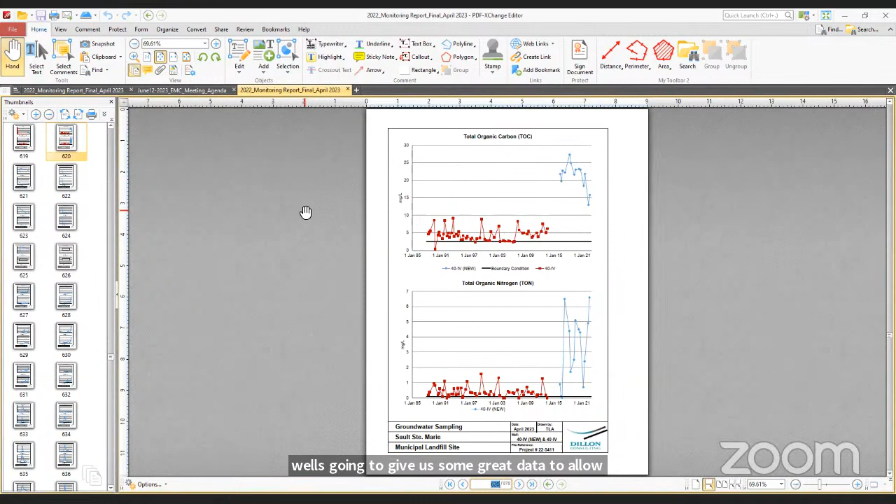So that's the one where the new well was installed too close to the leachate collection system, and in that particular area of the landfill there were access issues. We've classified this as being indicative of leachate source, but we've installed another well, called 79, located between this location and Canon Creek. This one's basically right beside it, so the new well is going to give us some great data to get water quality more representative of what's getting into Canon Creek.

Okay, now I asked for this one to be put up for the benefit of the new members, because as a layman reading the reports, I glance and say, whoa, what happened there? Some of the stuff is covered in the summaries, some in tables, but a graph like that suddenly catches your attention, and it explains the rationale for putting in well 79.

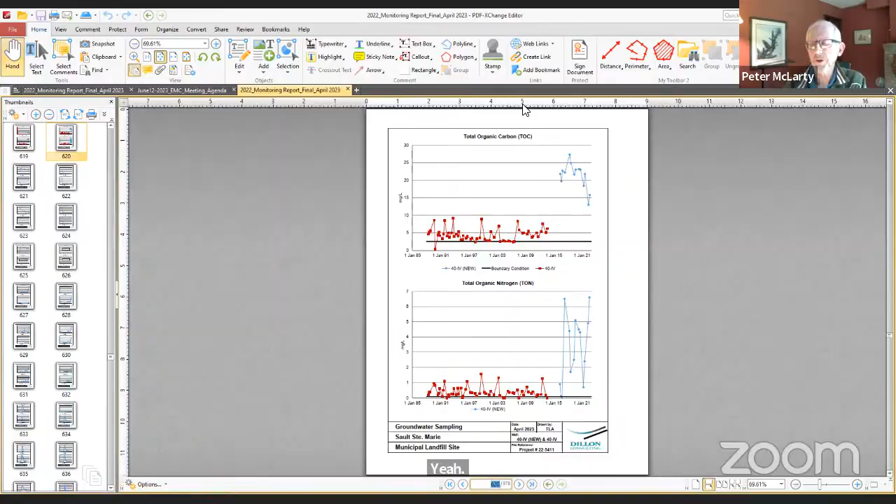It's a very good example. Okay, so thank you, Rob. If there are no questions, so Rob, thank you again for your report and staying with us, and we'll talk to you again in another year. Okay, thank you, have a good meeting. Thanks, Rob and Rick, for presenting the reports.

So anything else on the agenda? We have our standing item of odor control, and there have been no complaints for 2023. There's limited there, but I know Rick's report did speak to odor control measures, so I don't think I have anything additional to add at this time.

Okay, any of the members have questions or comments? Our next potential meeting would be in the fall. I think we're monitoring just to see if there's any other particular items we can report on, but I think the fall would probably be a good time for the next one.

Sorry, Peter, can I just add one thing? Just a reminder to everyone that 2023 is a transition year for blue box collection on curbside. So we're talking about the next meeting already, but September 30th of this year is the transition date for curbside recycling, which is a significant thing for the city. We don't expect any changes to the way curbside recycling is collected. GFL will continue collecting, but the city is no longer responsible for curbside collection.